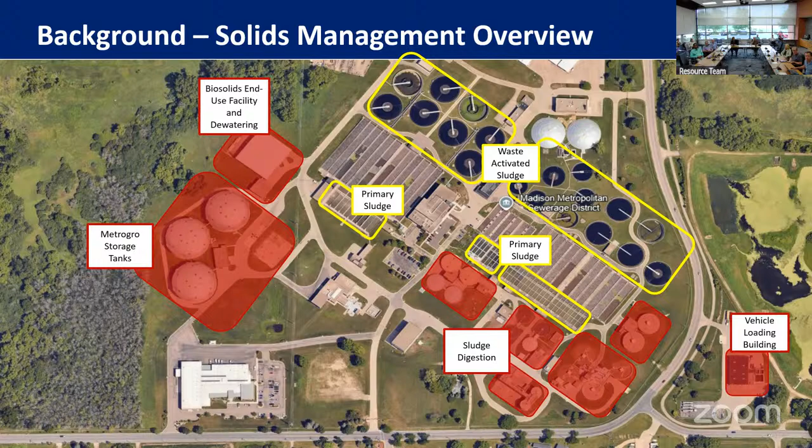So in the past, the district in 2010 completed the solids handling facilities plan. This facilities plan evaluated the solids handling system over a period of 20 years. Back then in 2010, this facilities plan also proposed to the district to look into the future need for capacity expansion, so storage capacity. So that was done back then.

And then in 2021, the district completed the biosolids management plan, which assessed different strategies and identified different steps regarding the biosolids product. So what are the main project drivers? There are three main ones why we need to do this. The most important is the storage capacity.

The district currently, under average conditions, can provide about 175 days of storage capacity, while the legal requirement for wastewater treatment facilities is that facilities should provide at least 180 days of storage capacity. So those are under average conditions. We are in compliance, but we are there. It's a challenge for the district.

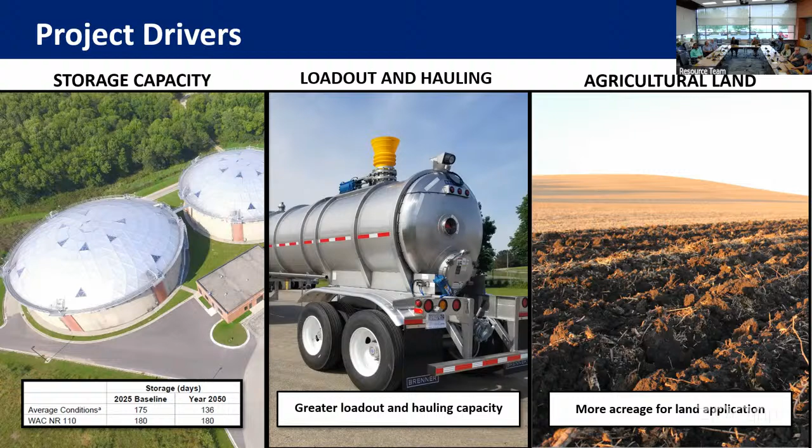What ties into that is the amount of biosolids that we are producing, which ties into the load out and hauling. The more biosolids we're producing, the greater the load out and hauling capacity needs to be. And then the third reason, tied into both of those, we need more acreage to actually be able to land apply. Currently, we are using about 7,000 acres of land to apply our biosolids.

A reminder from 7 years ago of the challenges that we cannot control, which are weather related. So in 2019, extended wet fall weather and early winter created the need for additional storage, and the district had to work with the Dane County landfill, coordinate to dewater more biosolids and then landfill there to meet the 2020 storage needs. But this is not a preferred option, and it was something that we had to work with to kind of solve the challenge.

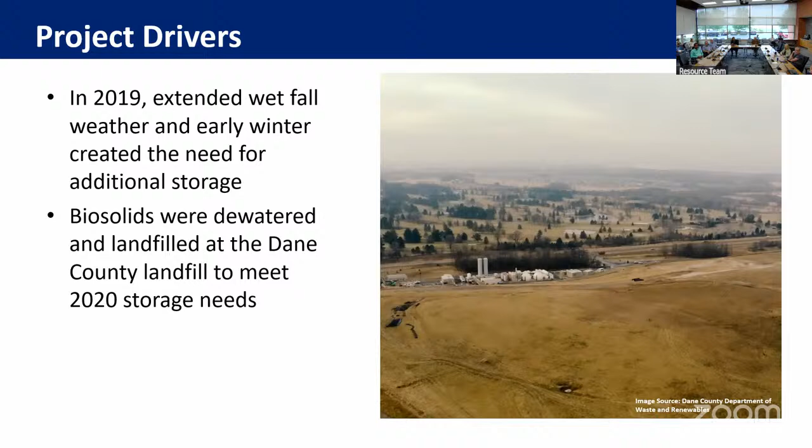What was included in the project scope? I would say the project scope can be divided in two main parts. The first one is the capacity and condition assessment and asset replacement. This is a similar map that was shown at the beginning of the presentation, but I just wanted to show color-coded processes that are included, so they're interconnected.

Denoted with red is the primary sludge management. Orange is the waste-activated sludge management. The blue is the sludge digestion and thickening. And then we have purple, Metrogro storage and vehicle loading building. And last, the green, sludge storage, dewatering, and end-use building. So a lot of infrastructure is included in this project. It's worth noting that in terms of asset replacement, we evaluated that what's connected to the sludge and biosolids operation is approximately 1,390 assets, so it's a large amount.

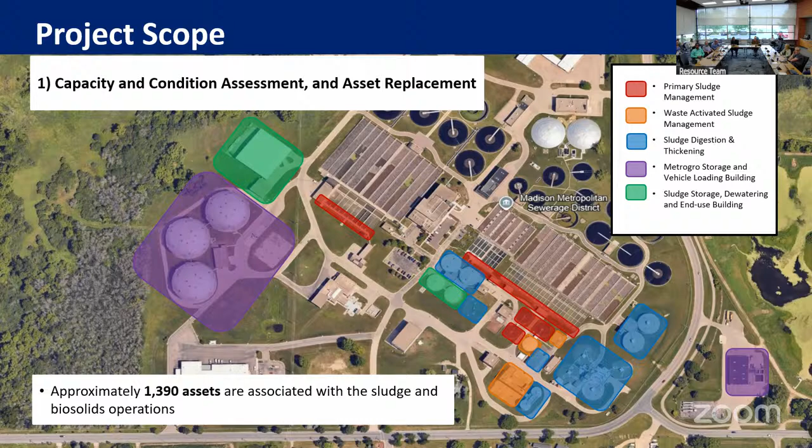The second part of the project scope is related to the sludge management alternative evaluation. The district looked into 6 alternatives and looked into their technical and process analysis, cost estimates, and non-monetary drivers. The estimated capital costs for all 6 alternatives range from $88 million all the way to $215 million. And the preferred alternative recommended and chosen was to produce Class A liquid biosolids, which had the highest overall ranking of non-monetary and other project drivers, with an estimated capital cost of $107 million.

Now, I would like to emphasize the $88 million. The lowest capital cost refers to an alternative to keep the operation as it is, but we would still have to construct a fourth Metrogro storage tank to meet our storage needs. But everything else with the operation would stay the same. And also we would have to do other infrastructure upgrades that I'll show later.

The 88 million is to keep the current Class B product? That's correct. And to move to Class A is 107 million, so it includes the 88 million that we'd have to do anyway? The 88 million is just the capital cost to keep the operation and add the fourth storage tank. That's for the alternative. Right. Do we need to do that even with the Class A? There are other costs associated; I'm gonna show the table at the end. I realize that. Yeah.

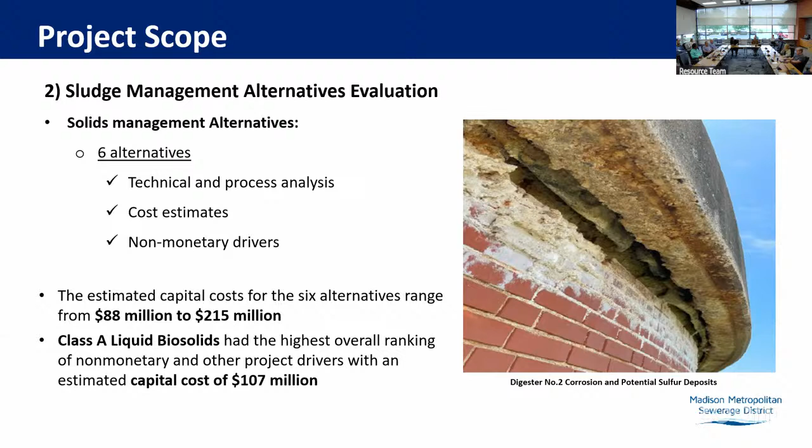So this is a simplified process schematic of the Class A liquid biosolids, the preferred alternative. In short, the biosolids and sludge would be dewatered. It would go into the reactor, and the process is called thermochemical hydrolysis process. Potassium hydroxide and steam would be injected, and it would thermally and chemically break down the biosolids to obtain the Class A liquid biosolids. This product would have a higher mass content, 3 times that Class B has now, so less water, the volume would decrease, and I'm going to talk about the benefits of this alternative.

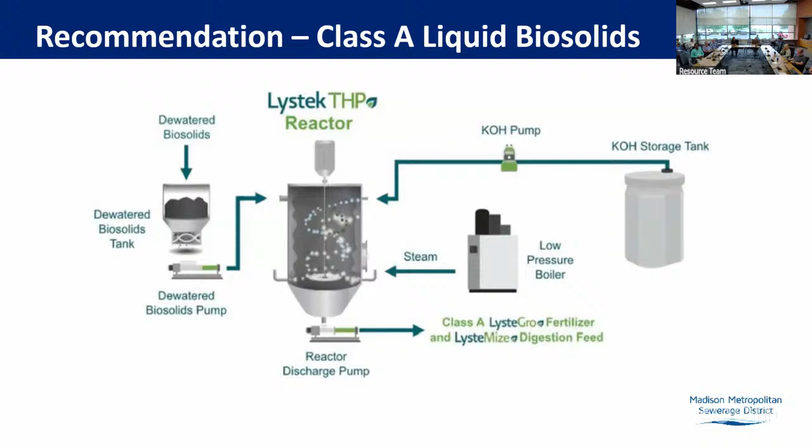Okay, so what are the benefits of the chosen alternative? Just to clarify, the green check mark essentially denotes that we are solving for the 3 main drivers that were presented at the beginning of the presentation. With this alternative, the district would have 350 to 400 days of storage capacity, and this is without needing to construct a fourth Metrogro storage tank. This is the process itself. So we would keep the 3 storages, and additionally, with producing Class A, we would obtain additional storage.

Then to your right, the Class A liquid is a much higher quality product. It has less pathogens and lower nitrogen, about 1/3 of what we have today. Lower nitrogen would allow us to apply more biosolids to the land, so this is a big thing. And then hauling trips would be decreased by about 2/3 because we would have less product and store more, so it would be better operation management.

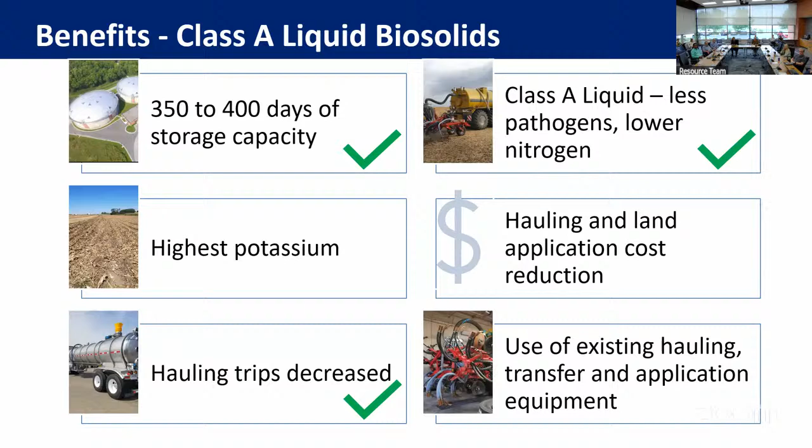Some other benefits that I would like to highlight: because of the injection of potassium hydroxide, the product would have higher potassium, which is a good nutrient for agriculture and potentially some savings for the farmers. They would not have to purchase it. Hauling and land application costs would be reduced, and also we would be able to use the existing hauling, transfer, and application equipment.

And then why the preferred consolidation of the 2 projects? Well, simply because it makes sense to do, because there's a lot of synergy between the 2 in terms of infrastructure and processes. They are interconnected, and it would be better and more effective to do it together.

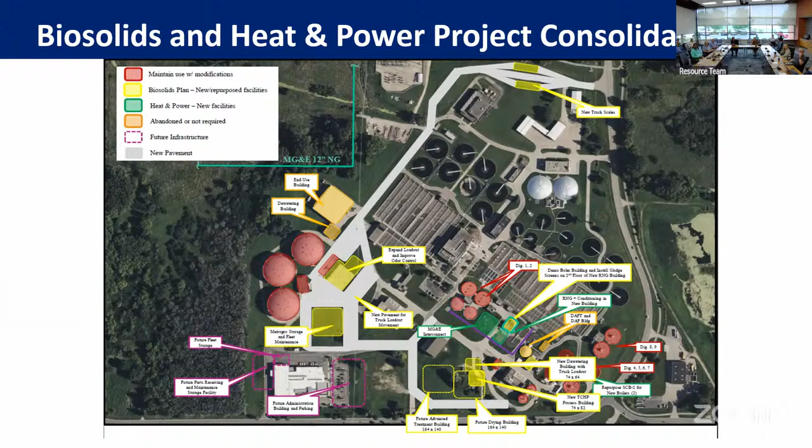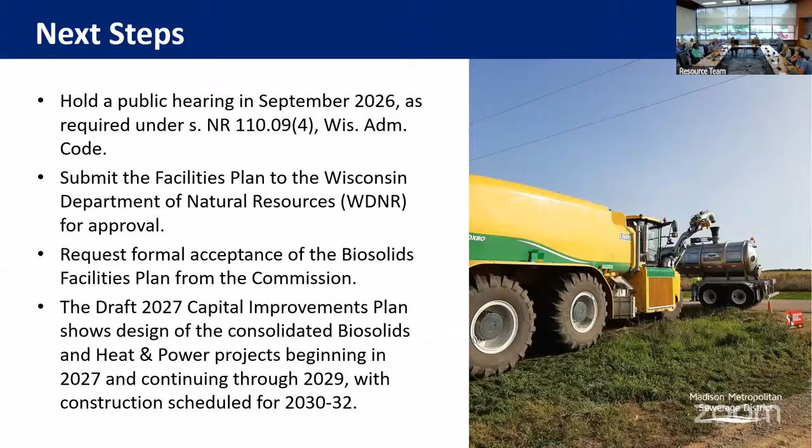Thank you. Commissioner Lytle, do you mind going back to the cost breakdown slide? I know we've talked about the pros and cons of bundling large facilities projects, and the estimates here for the heat and power improvements versus the biosolids. Are those estimates developed assuming the projects would be delivered separately? Would we anticipate any economies of scale, any cost savings by bundling the way we have planned? No expectations that we're going to guess what inflation will do between 2026 and 2030, but is part of that decision driven by some hope or data that bundling those two projects' capital costs would achieve some efficiencies?

These costs presented here are for bundling the two projects and doing them together. It's expected that the cost savings would be 10 to 15%, because if you're doing construction separately and then coming back, with inflation in the future, those things are taken into consideration. But these costs here are for the combined, consolidated projects.

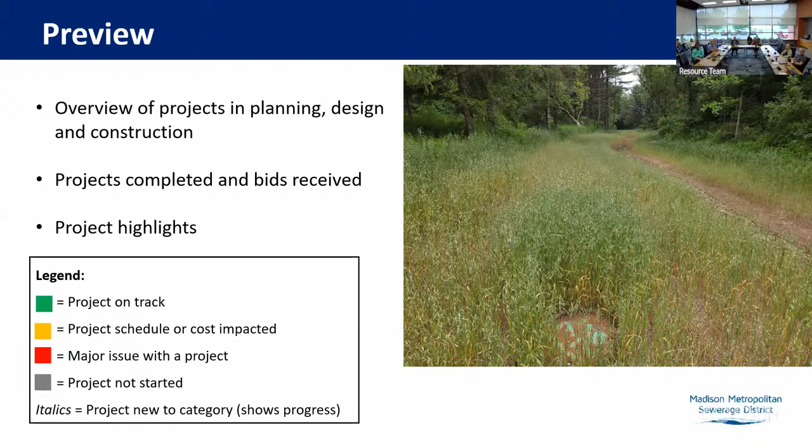So you know that I like to talk about the pictures on the slide. So the first one here is, I'll call it an after picture through the ravine area at Lower Badger Mill Creek Phase 6. You can't see it, but there's a pipe under the ground here, and you can just see in the foreground the casting of one of the manhole covers with the green paint on it there. After pictures are always exciting. Correct. Correct. It actually is a little bit further up the ravine, it's not right off Shady Oak, but kind of midway through the ravine, I'd say.

Sure is. All right, so on to planning projects, with the stoplight colors here sort of indicating how it's going. At the treatment plant, we have the laboratory remodel for which a planning study was done previously, and now we're working on an RFP for a detailed design for that. Next, we have the Biosolids facility plan, which I won't talk about because Anna just did a great job summarizing what's happening there. For interceptors, we have the Southeast Interceptor McFarland Relief Rehabilitation. That's gray because we haven't started work on that yet.

You see a new project below that, which is South Interceptor replacement at John Nolen Drive. So what you see on your slide is John Nolen Drive. You can see in the far lower left Willow Island at the Alliant Energy Center, where Bratfest is, if that gives you any idea where you are there. So we are starting to work with the city on that project. The city is planning reconstruction of John Nolen Drive along that reach, and we see an opportunity there to replace our crossing of John Nolen Drive, which is the South Interceptor, the blue line there.

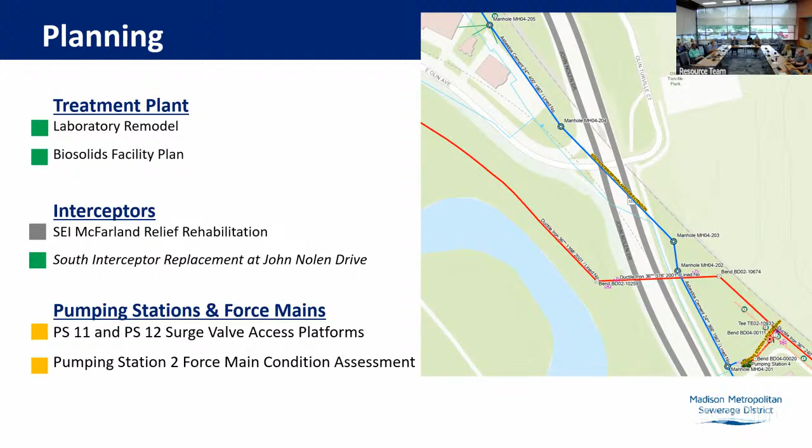All right, so on to design. Next up is the treatment plant projects in design. The first one on the list is the dryer and seeding modifications. I'll have a project highlight on that in a few slides, so I won't talk further about it here. For interceptors, you see the manhole rehab on the Old West Interceptor. That's shown in italics, which means it's moved from one phase to the next. So that's now moved from planning to design.

Many of the manholes included in that project are along Regent Street. So this is another project where we're working with the City of Madison as they design their Regent Street reconstruction, anticipating construction in 2027. We're showing that one yellow; it's proving to be a little more involved than we expected. We knew we had to rehab a bunch of manholes along there, but as the city's plans unfold, it's clear we may have to do more work there.

They are replacing a very large storm box culvert that goes down Regent Street, and in fact deepening the box culvert some. And so we need to get underneath that. So we may need to redo some of our crossings there that we weren't intending on doing. So stay tuned on that. We're working through that with the city.

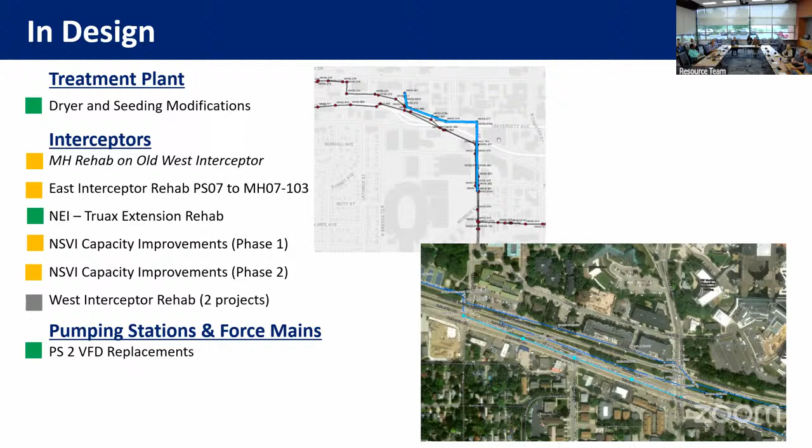All right, so on to current construction projects. So at the treatment plant, there's 4 ongoing projects in teal with the number 4 there, you can see. For interceptors, those are shown in blue, and there's 2 ongoing projects. One of those is the Lower Badger Mill Creek Phase 6, over to the far left. And then the other is the Southeast Interceptor relocation at the Yahara River, which, as you might guess, is over to the southeast on the Yahara River. So far right bottom.

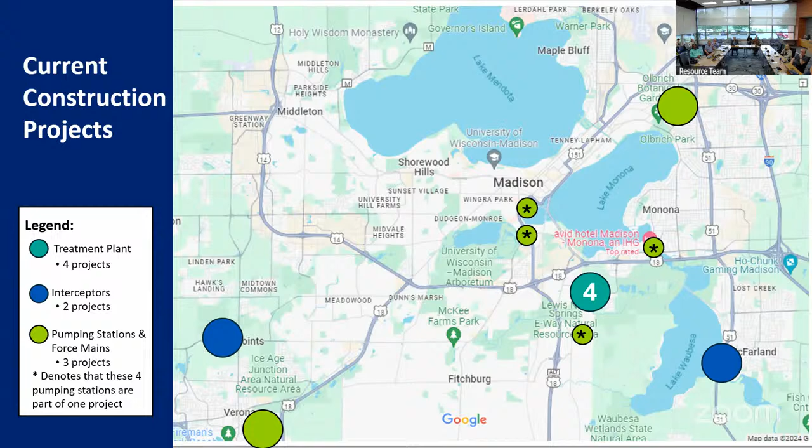And then lastly, for pumping station projects, we have 3 projects shown in lime green. And you see one of those projects has 4 small dots. So there's three total, but one of them shows 4 small dots with asterisks on them. And those pumping station projects are: down to the lower left is Pumping Station 17 in Verona, and then the four smaller ones are the Pumping Station bar screens projects, which is, again, one project, and then the one at the far northeast end of Lake Monona, up in the far upper right, is Pumping Station 10. We'll talk about those projects a little bit more on the next slide here.

So at the treatment plant, the four projects, you see liquid processing phase 2 in italics. That's now moved from design into construction. So we feel like we're at the end of the marathon, but we're just starting the race there. So we're excited to get working on that. We're working on contracting with that project, and we have a pre-construction meeting scheduled, so we'll know a little bit more about the schedule unfolding once we meet with the contractor. But what we're anticipating is, as you recall, there's lots of equipment involved with that project, so it'll be very heavy on submittal review over the winter and fall, and we expect on-site work to start next spring.

And then next, under treatment plant, is the W4 project. So if you look out the window, you can see Ahern's trailer. They are working on that inside the Headworks building right now. So that's great to finally get that one. That one took a long time to get through the submittals process. So it's exciting that we're actually working on that now. Boots on the ground now, so that's great. Next is Lagoon Dike improvements, and I'll have a project highlight on that at the end, so I won't talk further here.

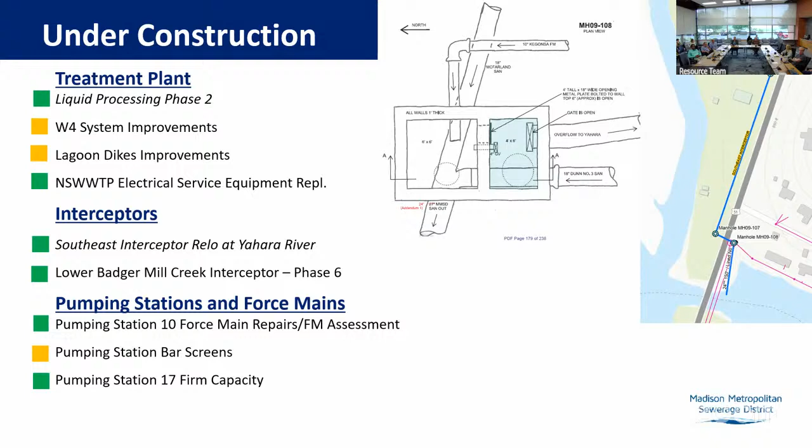All right, so on to projects completed this year. So here's the whole list. I'll just touch on the new ones that are added to the list since we talked last, so those are the ones in italics. Those are the sludge thickeners number 1 and 2 drive and mechanical replacements, and the crosstown force main air release valve and saddle tap replacement. Both of those you saw acceptance of work items come through commission in July. Just a quick note on the picture on the drawing, that's Kennedy Road in Waunakee. So we repaved that as part of the Northeast Interceptor Waunakee Extension Capacity Improvement Project Phase 1 after we put our pipe underneath there. So that is looking good.

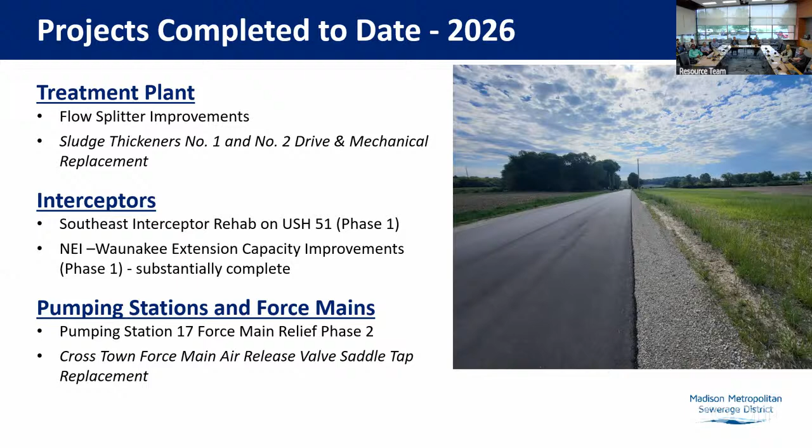Next up, just a couple of project highlights. So first, I wanted to talk just a little bit about the Lagoon Dikes project, as you saw a change order come through earlier on the consent calendar, so I wanted to tell you a little bit more about that. So you might recall that this project was sort of precipitated by the large rain events that we got back in 2018. So as a result of that regional flooding that happened at that time, Nine Springs Creek nearly overtopped

our lagoons. And as you might recall, our lagoons, there's a picture on the top of where those are. So they're basically straight east of the plant across the street. So the picture to the lower right shows some of that emergency work that happened at that time. What's happening in that picture is they were grouting the berm to stop some leaks through it.

So after that event, we began planning a flood resilience project. The design of that was, I would say, complicated by EPA involvement and also less than favorable geotechnical conditions underneath that berm. So we needed a very lightweight design that would minimize future settlement of those very delicate berms.

And you might recall that we have a different design for the south berm of Lagoon 2, so the red part on the top picture of the slide. That's, I'll say, the skinniest berm, and it has the softest soils below it. So for that berm, the design is a vinyl sheet pile wall. We bid that earlier this year, and installation of that is about halfway complete. So we started at the east end, and we've made our way kind of halfway along that berm.

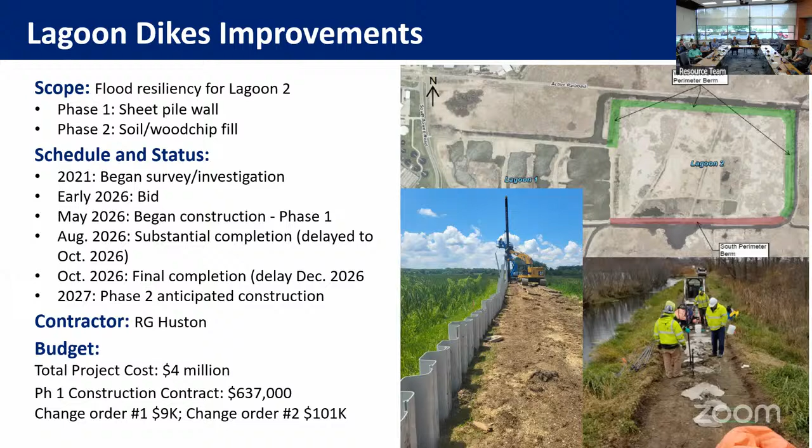All right. Last but not least, I wanted to give you an update on the dryer and seeding modifications project. So this is now at about 90% design. We hope this will be out to bid towards the end of the year. So what's this project? Again, this is an equipment replacement project. It's in our struvite harvesting building, which you can see right out the window over there. Some of you might recall what happens in that building. We have a struvite harvesting process in there that was installed with the 11th addition around 2013.

What that process does is essentially extract struvite from the filtrate that comes out of our solids processes at the plant. And what is struvite? It's essentially a mineral precipitate of magnesium, ammonium, and phosphate. And recovering it out of our process does two important things. So first, it makes a beneficial reuse byproduct, which is a dried granular product that can be used as fertilizer. We have a partnership with Ostara that takes that product.

The second important thing that pulling that struvite out does is that by removing it on purpose, it helps minimize it forming deposits in pipes and other parts of the plant where we do not want it to precipitate. So it essentially reduces maintenance needed elsewhere in the process.

So this project specifically, what is it? It's replacing the dryers and the equipment that go with them, such as the heaters and the cyclones, since this equipment is now in poor repair and there's a lot of outages and shutdowns, and it takes a lot of maintenance to keep it limping along. So in the slide, you can see a picture of the dryers on the top.

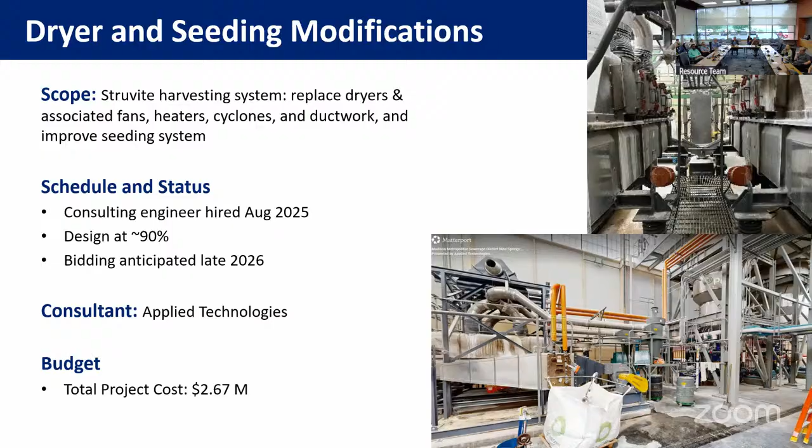All right, and that is all I have for today. Happy to take any questions if you have them. Anybody have any questions?

Okay, go ahead, Beth. I'm just curious, the vinyl sheeting that's going into the dikes out there, how long is that expected to last? Because with the winter, heat, cold, water, how... Yeah, it's got UV resistance and all of that stuff. So it's not intended to be a temporary product. It's a long-term product. I think the design life is something like 50 years. I mean, we'll see. We haven't installed a project like this before, but it is used for maritime applications, I guess. So it should have a good design life. Okay. Thank you.

I got a suggestion. Since we're going to be having new commissioners in January, and you probably can't fit it on your current landscape table, but maybe doing another one with the project name and number, the total project cost, who the consultant is, and who our project engineer is. Okay. I think it gives people kind of a one-click view as to how much we're dealing with in terms of project costs and consultants, who our lead project engineer is. I just think it would be helpful for new commissioners to see the scope of what we do.